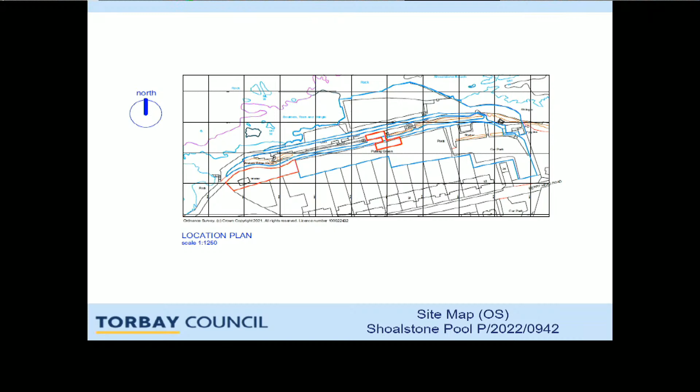Trying to see if I had a mouse or pointer. Okay, so the area to the left is where there is an existing public seating shelter, and that's where it's proposed to install some beach huts. There is another public shelter of a similar kind at the east end of the local green space. Just for clarity, the local green space is outlined in blue, the whole thing. And so the application relates to a small part of the site of the green space. And here's an aerial view.

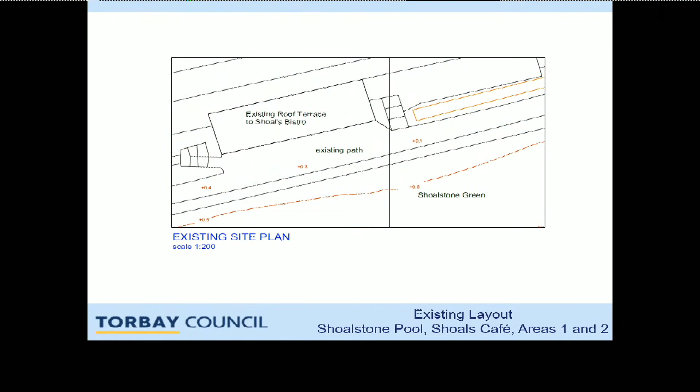There's a plan of what's there at the moment, and the existing elevations. As you saw in the photograph, the rooftop is currently surrounded by a blue Heras fence, and that's a profile of the site, which shows that the grassed area to the south of the path has a slight incline upwards.

Here's a plan of what's proposed in that area - a new set of stairs up to the rooftop with a railing beside. To the south of the path, the darker green area would be level, actually gravel, and the paler green area would be a banking of the grass leading up to the rest of the area.

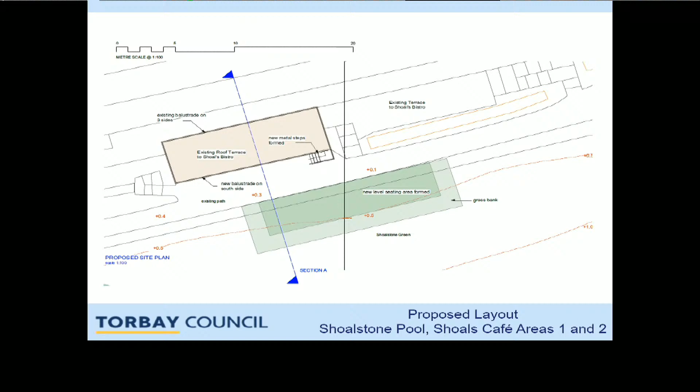There's not much difference in the elevations, to be honest. It really is just railing along the south side of the rooftop and a small staircase with a railing around it to keep it safe.

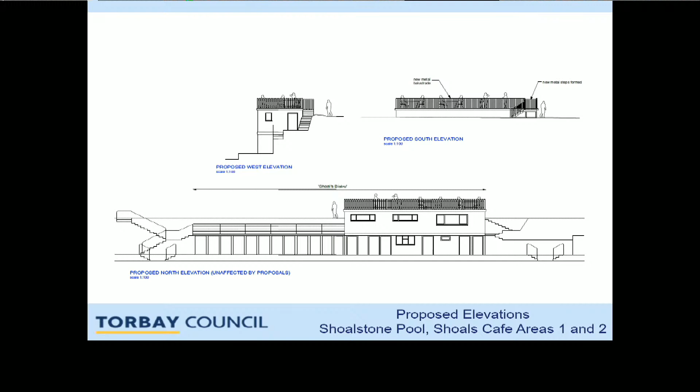This shows the profile of how the bank to the south of the path would be levelled, and the grass bank would be made slightly steeper at the back and probably at the sides as well.

There's a detail through the seating area just showing that it's retained with timber, a natural material, and that hardcore and a natural looking gravel would be used to maintain a permeable surface.

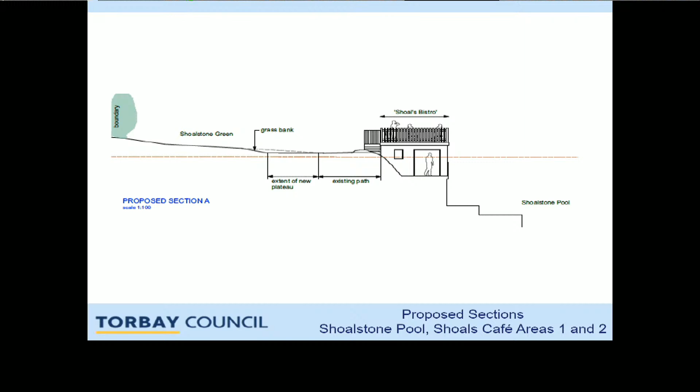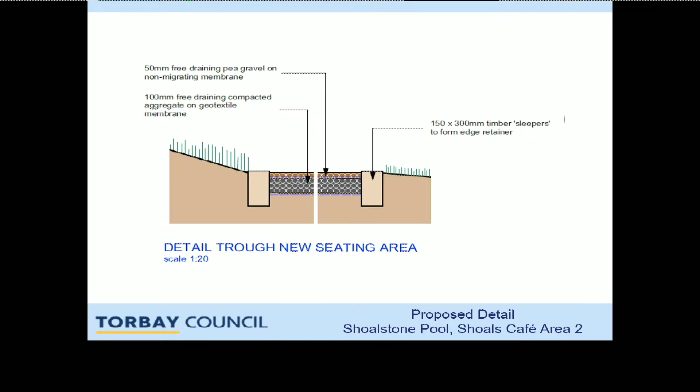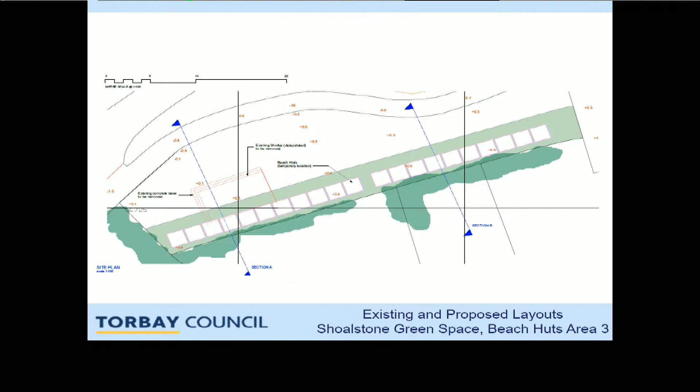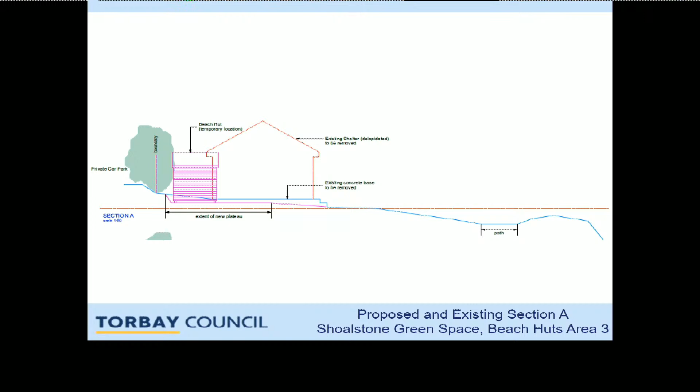So area 3 is proposed to have 21 beach huts on it once the public shelter has been removed, in a line backing up to the hedge to the car and boat park. There's a profile of how high they would be compared with the existing seating shelter, so they would kind of nestle in behind the boundary hedge.

That's a different section, and they won't be pink. No, this is just an illustration. Details of the material and colour of materials can be sought through a planning condition, which is recommended, but I think this was just to make them stand out in the elevation drawings.

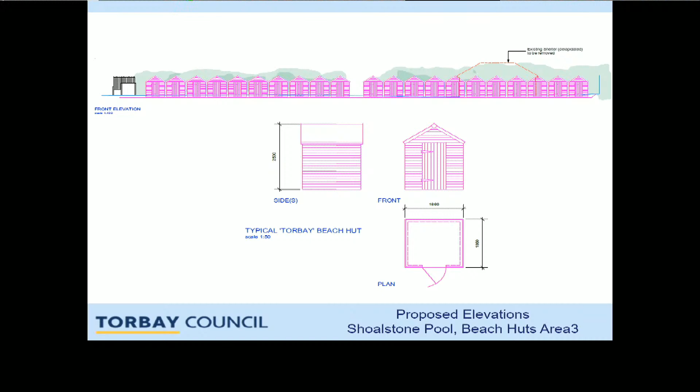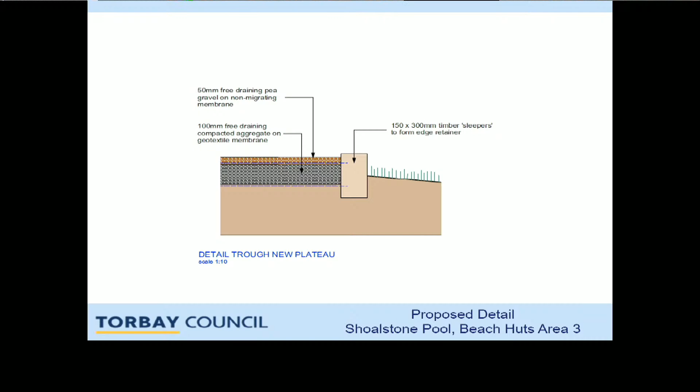This is more what they would look like, the traditional Torbay style of beach hut with 1.8 metre high eave and a 2.35 metre high ridge and a footprint of 1.8 metres squared.

So these are the neighbourhood plan policies that were relevant - established architecture for the conservation area and the use of the local green space and appropriateness of development within that. So these were the main issues.

Okay, the area has several designations. It's a core tourist investment area, it's an urban protected landscape area, it's a local green space, and a conservation area, and there are listed buildings

to the rear, which I'll show you on the aerial map.

So to the south of the green space is the gardens of the houses which are on Berry Head Road, and the ones in the photograph here are listed buildings grade 2.

So you can see that the proposed beach huts would not actually be behind a listed building, they would be behind the car and boat park, and the seating areas would be settled down quite low in profile on an existing rooftop and down behind hedges and a grass bank, so the impact on those listed buildings would be fairly minor.

So the issues - the proposal aims to extend the tourism offer of the existing local green space following increased demand over recent years.

Visually, the urban protected landscape area wouldn't be really adversely impacted, subject to a condition requiring replacement public seating. I think that was felt quite strongly in the objection that we had from members of the public.

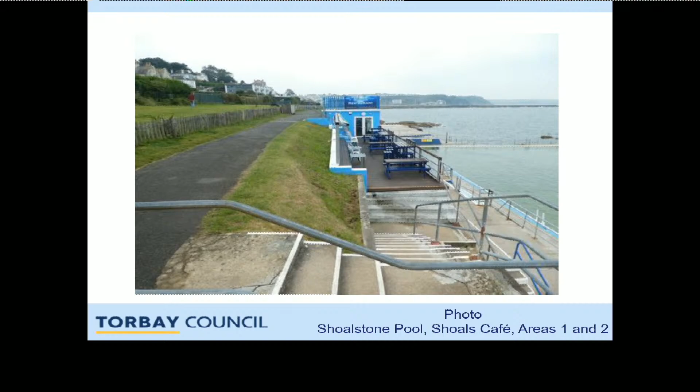So approval subject to, one, the planning conditions outlined in the report, with the final drafting of planning conditions delegated to the Assistant Director of Planning, Housing and Climate Emergency. And I've also got a suggested rewording for condition 5 following this morning's meeting, which I'll run through. Secondly, the resolution of any new material considerations that may come to light following Planning Committee, to be delegated to the Assistant Director of Planning, Housing and Climate Emergency, including the addition of any necessary further planning conditions or obligations. So my recommendation for condition 5 is requiring submission of details of works to the restaurant rooftop and the green level seating area.

I've just wanted to add in the bold underlined words, which you can see on the screen, good. So that's just making clear the boundary fences need to be included, and seating and table furniture, and where possible the number of covers. So those details can be submitted by condition when they're known, because the number of covers isn't known at present, and then a recommendation that the approved number of covers not be exceeded at any time. So those details would be sought through the condition 5. Thank you.

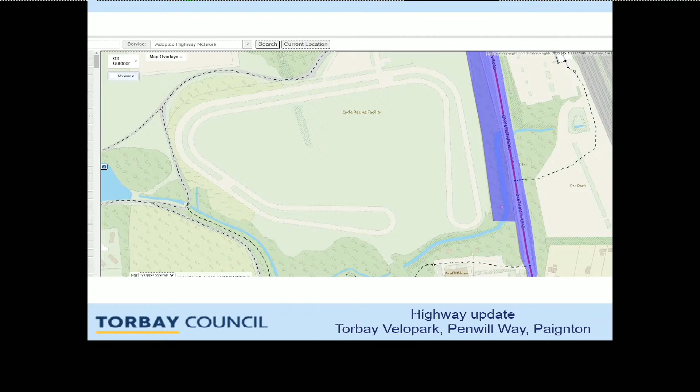So to go on to the proposal - before I do, there has been a highway update provided at the end of last week, showing that the area in purple is highway land. So prior to commencement of development, the sports development team have a request to stop up that element of highway that includes the mown grass track on the right hand side of that plan. It's a technical piece of work which won't really impact the planning permission if granted, but I thought I'd mention it as an update.

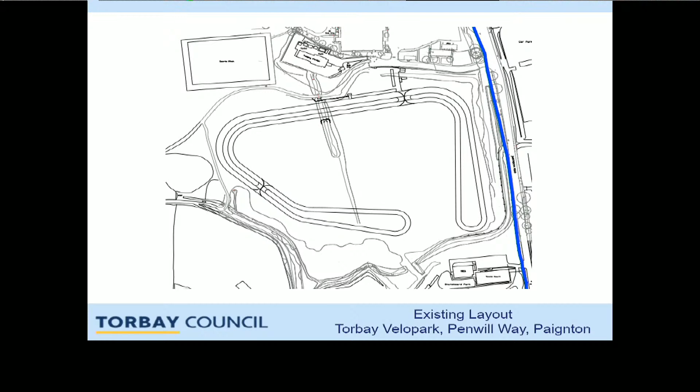The proposal is a number of 2 tracks, one a public course in purple and one a competition course in orange. Those are all mown features in the existing landscape. In terms of more permanent structures, there'll be an earth ramp, 15 metres by 45 metres at 2 metres in height, to the northeast corner. There'll be a sand pit, 6 metres by 30 metres with a timber sleeper frame, an earth-formed rollers, 6 by 24 metres, built to 1 metre in height, and a set of earth-filled steps, broadly in the same area, 3 metres by 10 metres with a timber frame around it. And a pump track, which you can see to the north of the site on the way in.

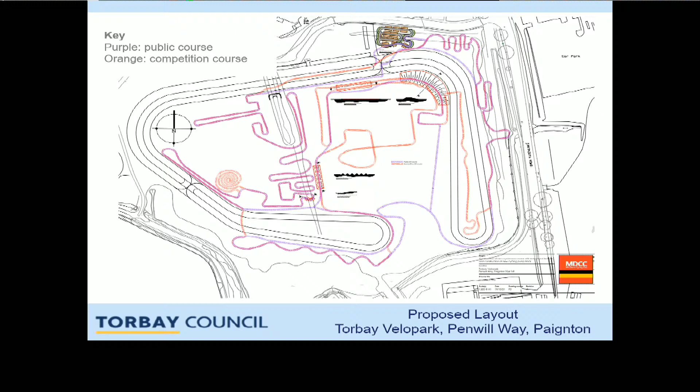The key consultation responses as part of this application: the Environment Agency had no objection, subject to a condition requiring a remediation strategy. The highway section have no objection other than the update provided as part of the response last week, which I've just mentioned. Sport England have also confirmed they have no objection, subject to a condition requiring a scheme to manage and maintain the adjacent sports pitches. Sport England have said they support the positive steps taken to resolve those issues in the past.

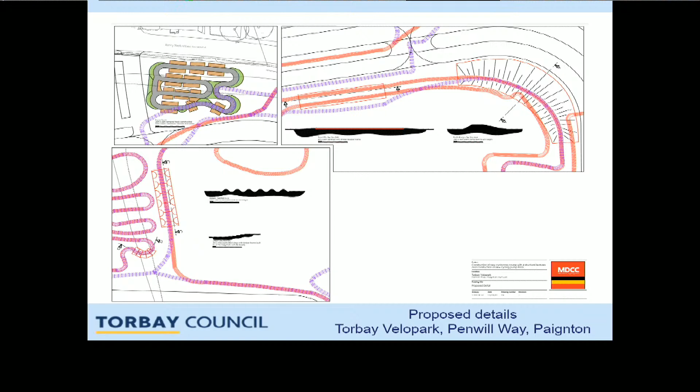You can see clearly here now a much closer view of the proposals, with the pump track in the top left, the earth mound to the right-hand side, whose profile you can see in black, with the low-level sand pit on the left, and the bottom image showing that plan with the rollers and some steps. In terms of principle of the development, that's a typical detail of a pump track seen elsewhere.

In terms of principle of development, the proposal would enhance the range of sports and recreation provisions of the leisure centre for residents, visitors and tourists, which is in accordance with the healthy Torbay strategy and policies in both the local plan and the Paignton neighbourhood plan.

In terms of sports and recreation, we're guided by policy SC2 as well as the NPPF, which has a set of three criteria. This goes to the presumption against any loss of existing recreation and leisure facilities unless three criteria are met, which are covered in the report.

So to summarise, the proposal is inextricably linked to the playing pitch strategy, which is nearing completion and should be ready by July this year. That's very close to meeting the first and second criteria. The strategy will aim to resolve those historical issues around pitch demand for the rugby pitch and its condition. The proposal does meet the third criterion of policy SC2, which satisfies the test within the NPPF.

So the proposal is considered acceptable on ecological, biodiversity and arboricultural grounds, also in terms of design, visual impact and landscape. There are no objections on any of those grounds or from local neighbours. The proposal is considered acceptable and won't cause harm to the character of the area or local amenity, provides acceptable arrangement in terms of ecology, highways, contamination, flood risk, and is considered acceptable in terms of the local plan, the neighbourhood plan, and other material considerations.